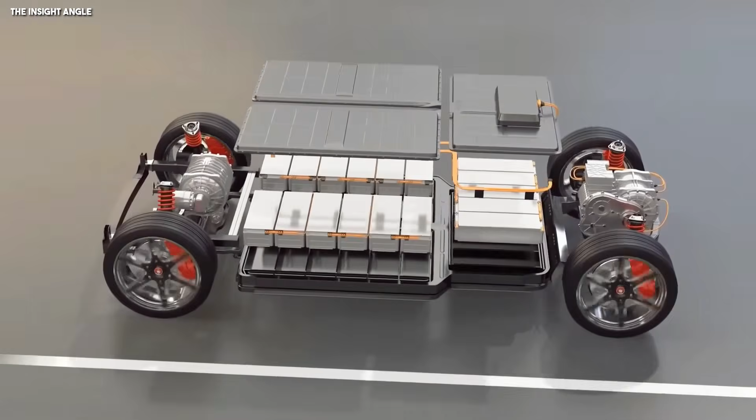Solid-state batteries, a 1200-volt system, and charging capabilities that push beyond what many considered achievable. This development from Dongfeng reshapes the conversation. Before diving deeper, and there is plenty to explore, let me ask you something. What would convince you to switch from a gasoline or diesel vehicle for good? For many drivers, it boils down to concerns about distance, refill time, and overall cost.

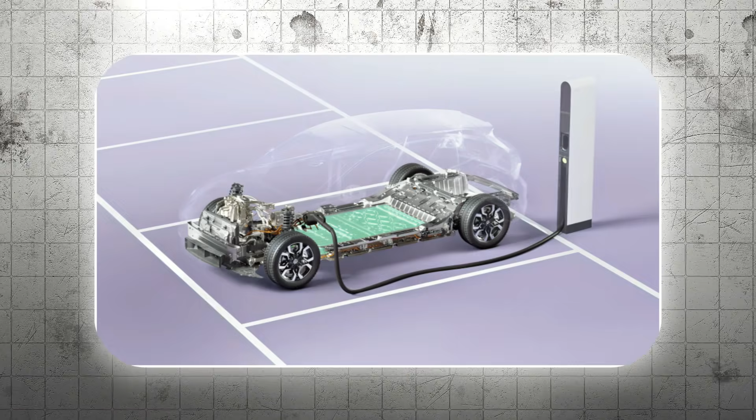Electric models have been steadily addressing these issues. But what Dongfeng has put forward does not simply reduce the obstacles. It removes them almost entirely. We are looking at solid-state batteries reaching energy densities as high as 500 watt-hours per kilogram, ranges up to 1,000 kilometers on a single charge, a 1200-volt electrical setup, and four in-wheel motors delivering more than 400 kilowatts of combined power.

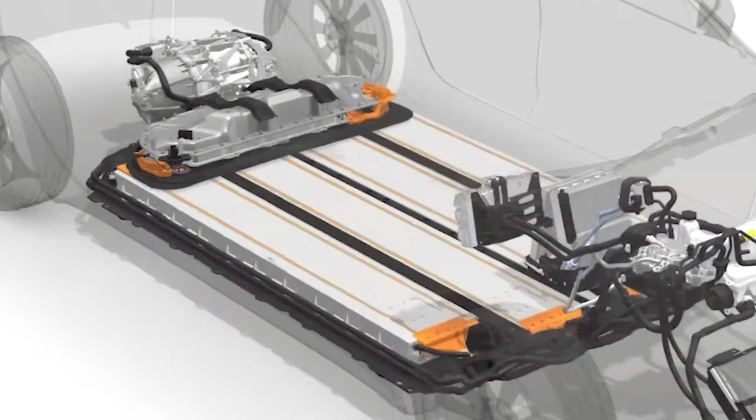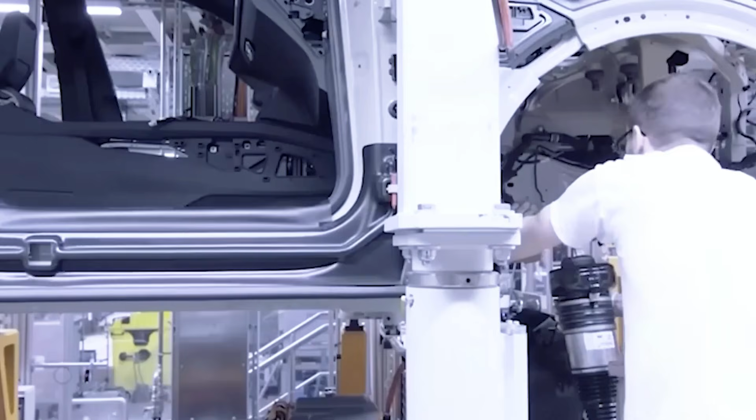The most striking part? This is headed for production, with mass manufacturing scheduled to begin in September 2026. That is less than a year and a half from now. Let us examine the pieces, because there is a great deal to unpack here. And each element matters. Who is Dongfeng?

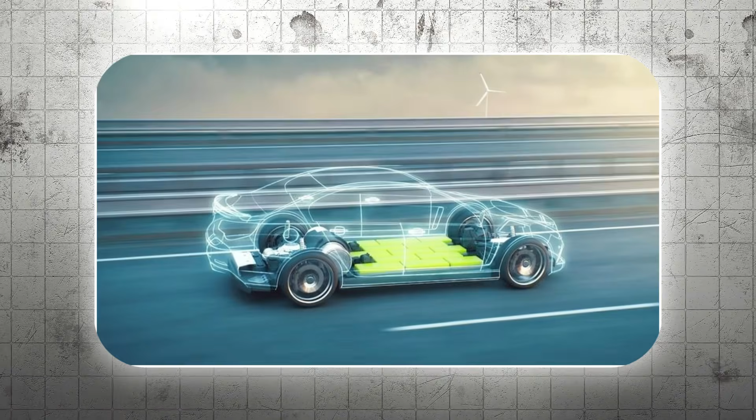Dongfeng ranks among China's long-standing vehicle producers, and they have achieved something few others have managed in everyday vehicles. They have introduced the first production electric model featuring four in-wheel hub motors, paired with next-generation solid-state batteries.

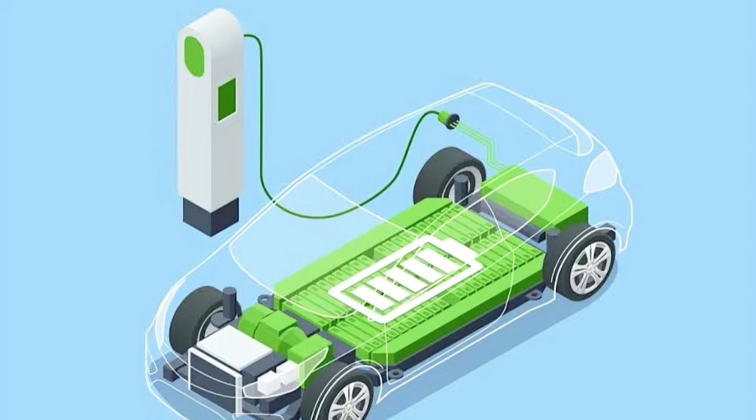To be transparent, I once purchased one of their earlier vehicles at auction, with plans to repurpose its battery for home storage. The setup did not work out at the time, and another viewer ended up buying the car from me. You know who you are.

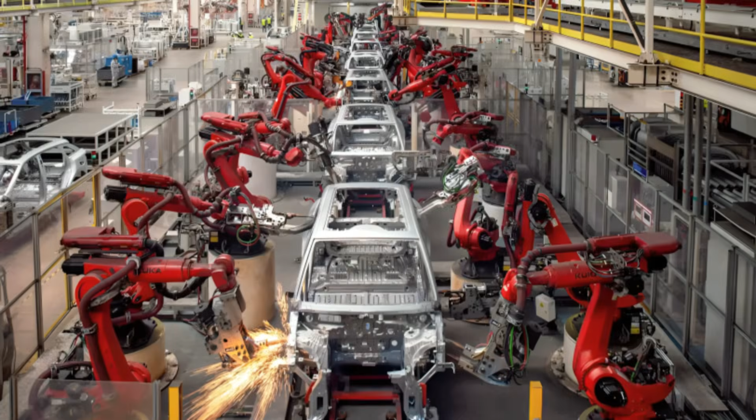The takeaway is that Dongfeng brings real experience to the table. They have manufactured vehicles for years, and are now focused on tomorrow's standards. At the 2025 World Power Battery Conference in Yibin, Sichuan, Dongfeng shared updates that rippled across the sector. Yet much of the coverage outside China has remained quiet. So let us address that here. We will begin with the element that stands out to me even more than the batteries themselves.

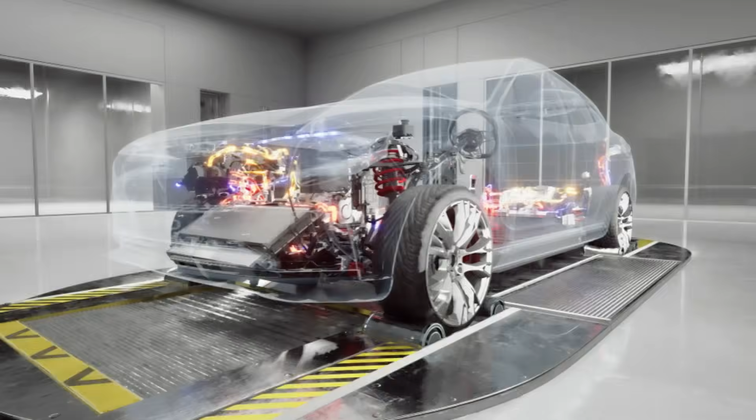Four in-wheel hub motors. What does this actually involve? Traditional setups use a single central motor connected through axles and drive shafts. Dongfeng places an individual electric motor directly inside each wheel. Each motor weighs between 5 and 7 kilograms and generates 100 kilowatts. 4 wheels mean 4 motors, delivering 400 kilowatts total.

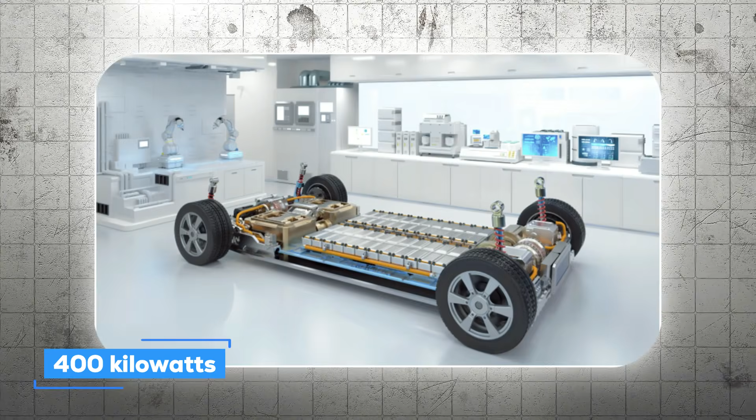The real advantage goes beyond raw output. In-wheel motors enable torque vectoring, where each wheel receives independent power adjustments in real time. This level of control feels like switching from a thick marker to a precision pen. It transforms handling during turns, stability on wet or icy roads, and overall responsiveness.

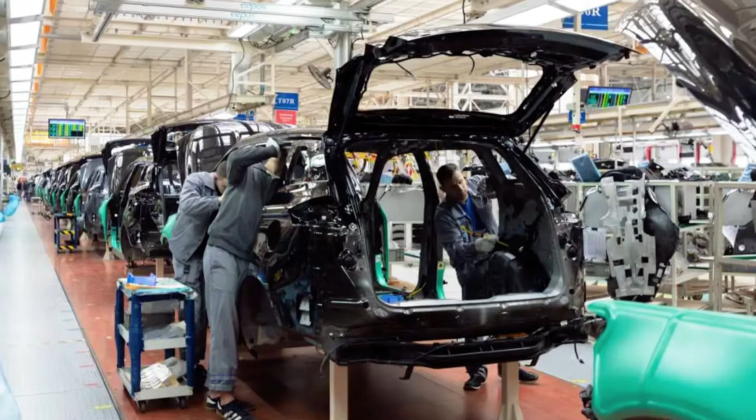Removing the central drivetrain also opens up significant interior space. The result is more room for passengers, additional storage, and a fundamentally different vehicle layout. Dongfeng intends to combine this platform with their new solid-state batteries by the end of next year, creating a production model with both technologies. The batteries that change the equation.

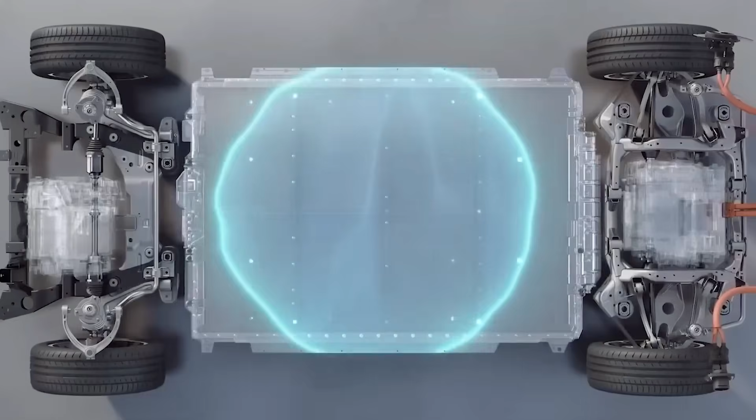Dongfeng has already established a 0.2 gigawatt-hour pilot line for solid-state batteries. They are not in the planning phase, they are producing them. Full-scale manufacturing is set for September 2026. What separates solid-state technology from current lithium-ion batteries? The electrolyte. Traditional cells use a liquid medium for lithium ions to move between anode and cathode. That liquid brings challenges: flammability risks, gradual degradation, and constraints on energy density plus charging speed.

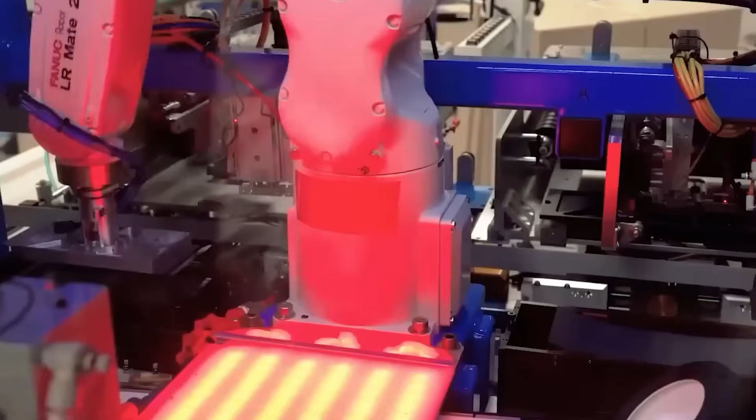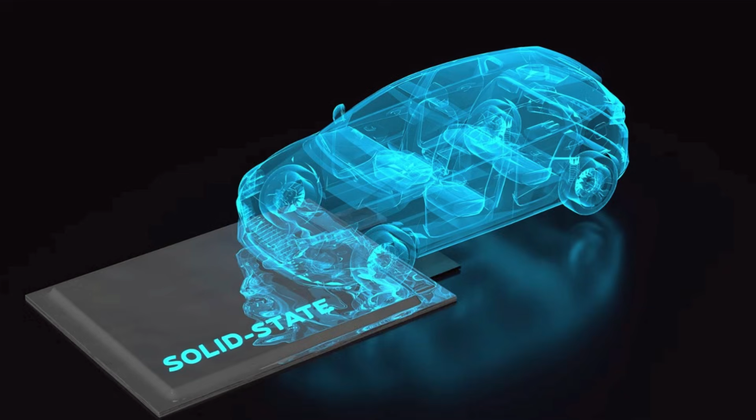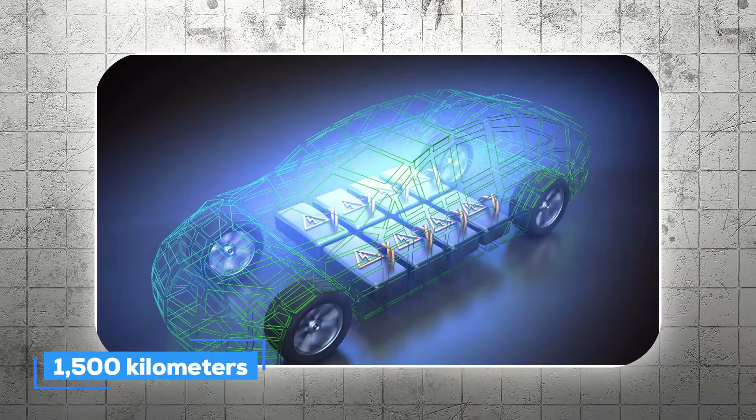Solid-state designs replace the liquid with a solid material. No liquid means reduced fire concerns, quicker ion travel, and the ability to store more energy in the same volume. Dongfeng is developing 3 variants: 350 watt-hours per kilogram for around 1,000 kilometers of range, 400 watt-hours as a stepping stone, and 500 watt-hours per kilogram using sulfide chemistry that could reach 1,500 kilometers. For perspective, today's leading lithium iron phosphate batteries, such as those in advanced blade designs, hover around 165 watt-hours per kilogram.

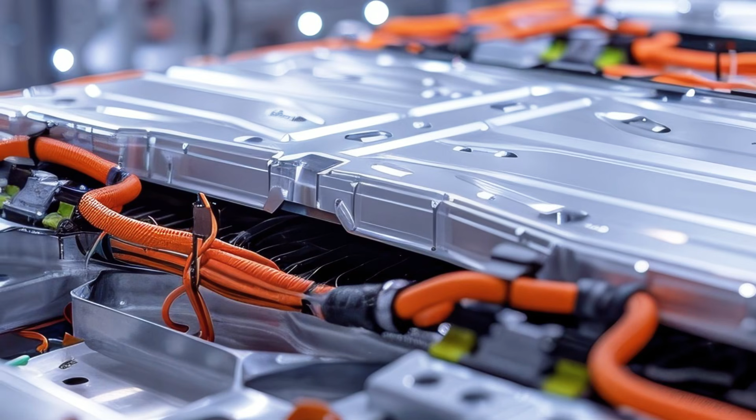Dongfeng's version, at 350 watt-hours per kilogram, more than doubles that figure. At 500 watt-hours, it triples the energy density of mainstream options. That opens possibilities for triple the distance with the same battery weight, or equivalent range with a much lighter pack. Both outcomes represent major shifts.

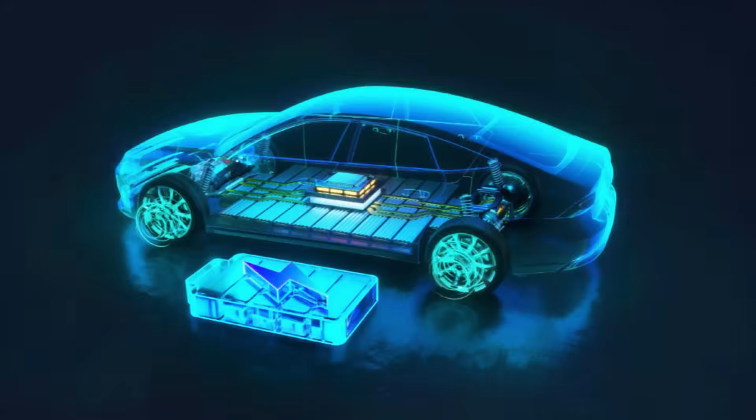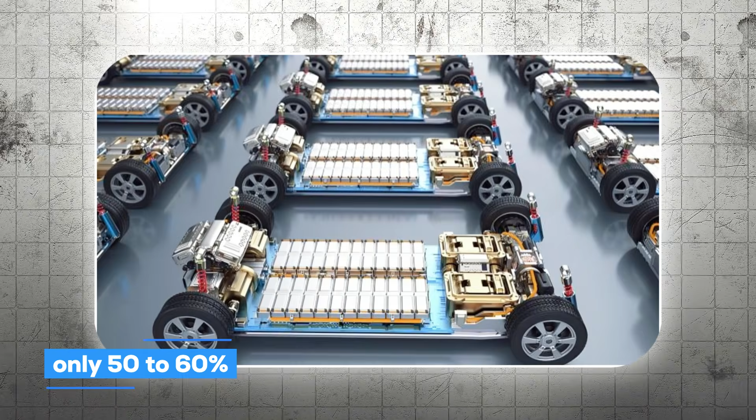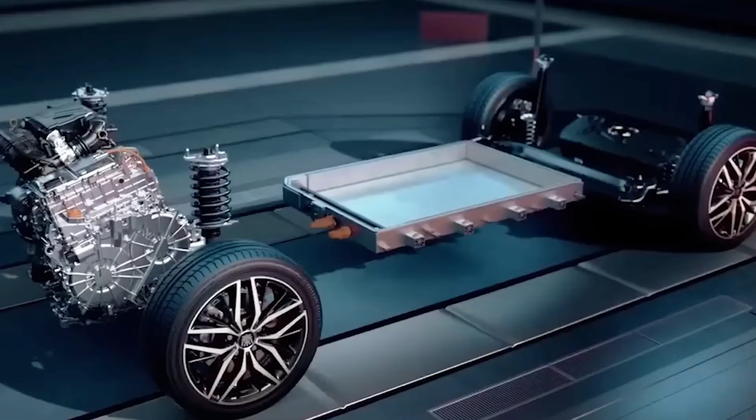Performance in tough conditions. Cold weather has long challenged electric vehicles, especially certain lithium iron phosphate packs, where range can drop sharply in freezing temperatures. Some batteries retain only 50 to 60% of capacity in extreme cold. Dongfeng reports their solid-state cells maintain over 72% energy at minus 30 degrees Celsius. That marks a clear improvement over liquid electrolyte designs, which manage around 60% under similar conditions. It is not flawless, but the direction is promising.

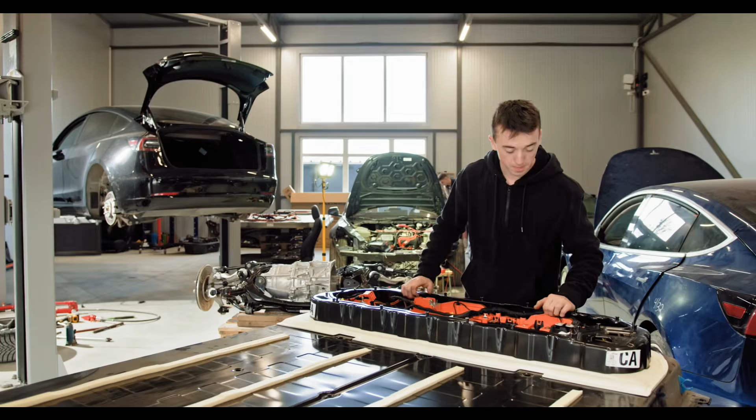Safety receives equal attention. Standard tests expose batteries to 130 degrees Celsius in thermal abuse scenarios. Dongfeng pushed their packs to 170 degrees Celsius, and they passed. They did not merely meet requirements. They exceeded them by a meaningful margin. That level of performance reflects genuine confidence in the design.

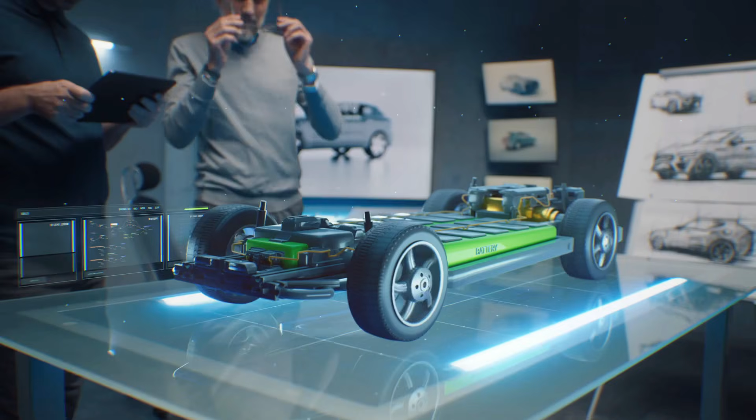Charging that redefines convenience. Dongfeng unveiled a 1200-volt ultra-high voltage platform using their own 1,900-volt silicon carbide power modules. Most current electric vehicles run on 400-volt systems. Premium options like certain Porsche or Hyundai models use 800 volts and already charge quickly by today's measures. Moving to 1200 volts allows faster energy delivery without excessive heat. Higher voltage equals greater power and quicker sessions.

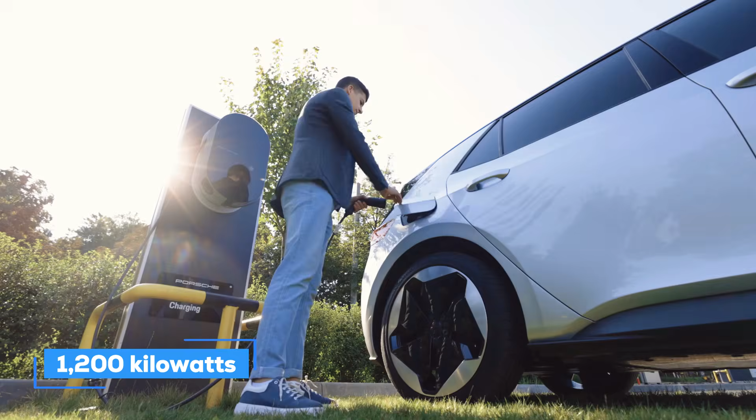The figures are striking. Dongfeng claims 2.5 kilometers of range added per second of charging. In 5 minutes, that translates to 750 kilometers gained. With a 2-megawatt charger, they project 450 kilometers in the same time frame. While 2-megawatt stations remain uncommon even in China, the 1200-volt architecture supports around 1,200 kilowatts. That is roughly 5 times faster than a typical Tesla supercharger peak of 250 kilowatts. Most public fast chargers today deliver 50 to 350 kilowatts. At these speeds, recharging an electric vehicle takes less time than filling a traditional tank.

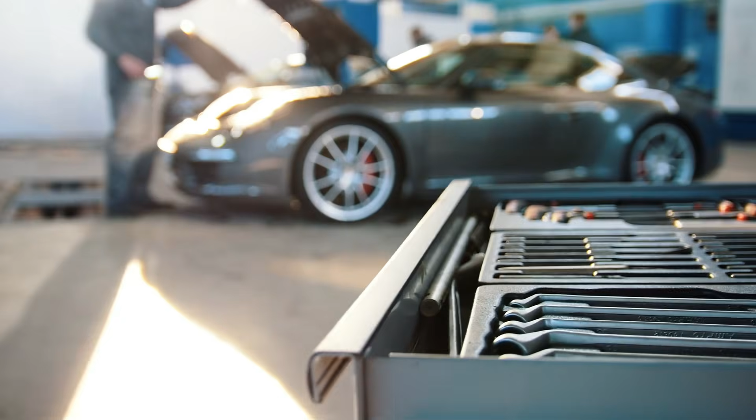The larger shift is underway. Stepping back from the specifications reveals something deeper. Dongfeng has not simply improved the battery. They have outlined a new standard for electric vehicles. Solid-state cells with triple the energy density of current options. A 1200-volt system supporting ultra-rapid charging. 4 independent in-wheel motors with advanced torque control. And production is starting soon. This kind of vehicle does not compete directly with gasoline cars or even today's electric models. It operates in its own category.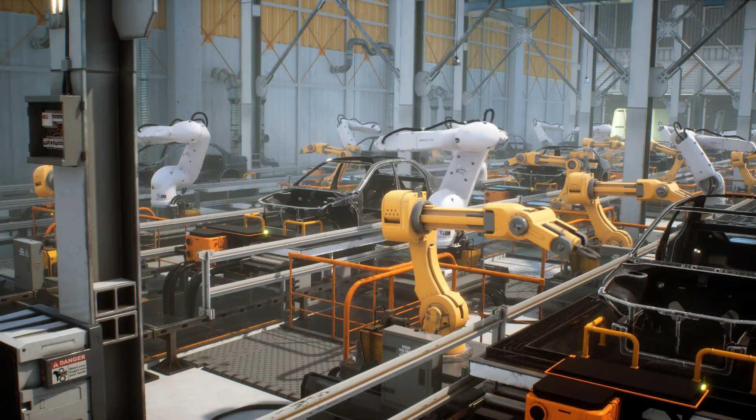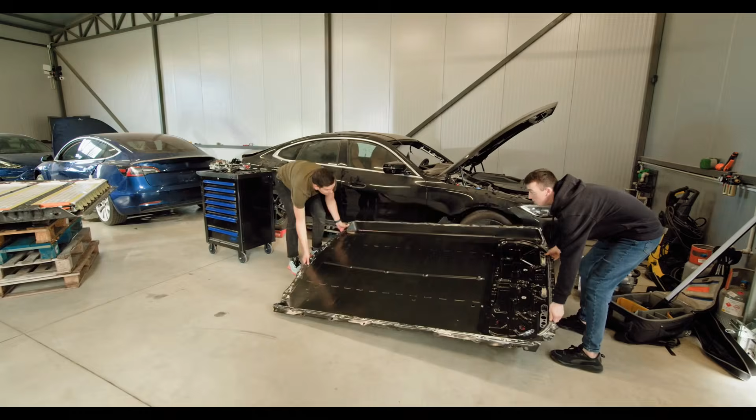Hundreds of billions of dollars flow into these technologies globally. Artificial intelligence speeds up material discovery. Talented engineers tackle every challenge. Progress will not slow. It will gather momentum. For some, the rapid changes feel difficult to absorb. New developments arrive weekly. Yet this is how meaningful advancement unfolds. It is humanity addressing transportation needs with solutions that are cleaner, quicker, more affordable, and more capable than previous options.

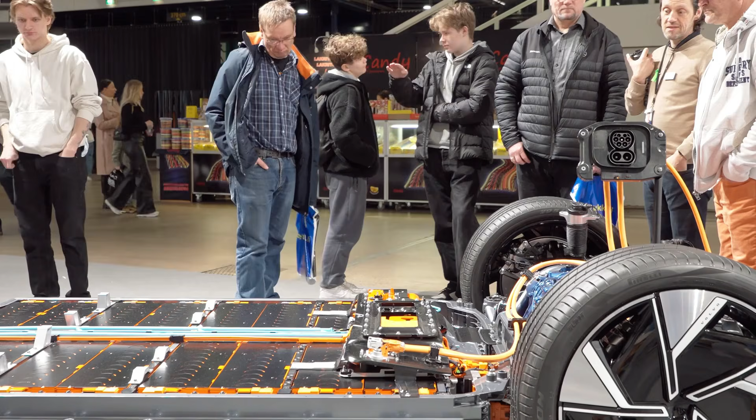Here is the key takeaway. Not long ago, discussions centered on whether electric vehicles met basic standards for range, charging, and readiness. That conversation has moved on. What Dongfeng has demonstrated, solid-state batteries, high-voltage platforms, in-wheel motors, and near-term production, marks a generational step forward. 500 watt-hours per kilogram could deliver 1,500 kilometers of range. That means a round trip from Sydney to Melbourne or London to Edinburgh and back again on one charge.

Charging at 1,200 kilowatts means 5 minutes at a station, matching the time spent paying at a fuel pump. 4 in-wheel motors create a driving feel no combustion engine can match, regardless of brand. The path ahead is electric, and developments like these suggest it is arriving sooner than many expected.